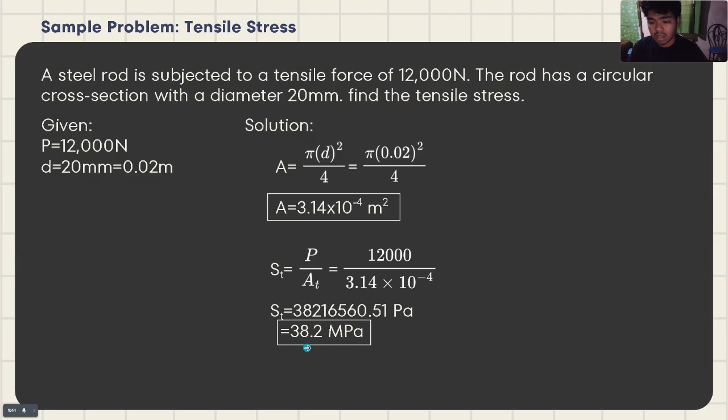Next sample problem, shear stress. A steel bolt is subjected to a shear force of 8,000 Newton. The bolt has a circular cross section with a diameter of 16 millimeter. Find the shear stress. Given force is equal to 8,000 Newton, then diameter, which is 16 millimeter. Convert this to meters, 0.016.

For the solution, use the formula for area, which is equal to pi d squared over 4, equal to pi times 0.016 squared over 4, to have an answer of 2.01 times 10 to the negative 4 meter squared. Since we have the area, we can solve for the shear stress, which is equal to P over A.

Equal to 8,000 over 2.01 times 10 to the negative 4, to have an answer of 39,800,995.02 Pascal. Divide this by 1 million to convert it into MPa, which is equal to 39.8 MPa.

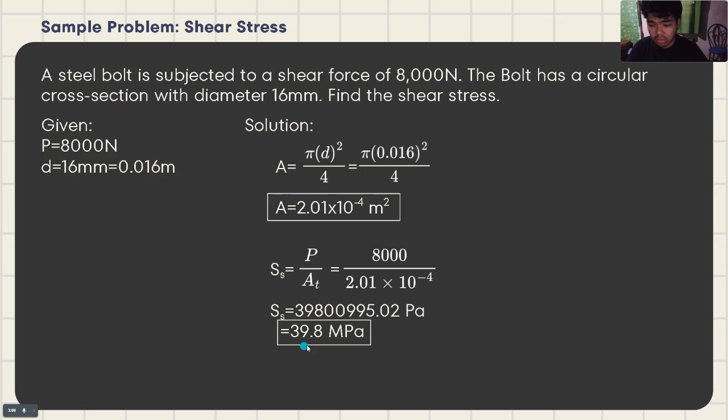Next sample problem, torsional stress. A solid circular shaft of diameter 40 millimeter is subjected to a torque of 500 Newton meter. Find the maximum torsional stress. Given torque is equal to 500 Newton meter, and diameter, which is equal to 40 millimeter, convert this into meters, which is equal to 0.04.

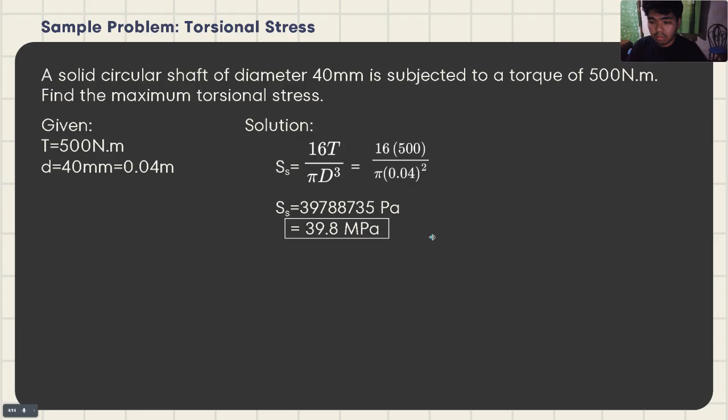For the solution, since this is a solid circular shaft, we will use this formula: shear stress is equal to 16T over pi d cubed, equal to 16 times 500 over pi times 0.04 cubed, to have an answer of 39,788,735 Pascal. Again, divide this by 1 million to convert it into MPa, which is equal to 39.8.

Next sample problem, bearing stress. A steel plate is connected using a bolt of diameter 20 mm. The plate is 10 mm and the load applied is 10,000 Newton. Find the bearing stress on the plate. Given force or load, which is equal to 10,000 Newton. Diameter of the bolt, which is 20 millimeter, equal to 0.02 meters. And thickness of the plate, which is 10 mm, equal to 0.01.

For the solution, since this is bearing stress, we will use this formula for area, which is d times t, equal to 0.02 times 0.01, which will give 2 times 10 to the negative 4 meter squared.

Since we have the area, we can solve for the bearing stress with the formula F over A, which is equal to 10,000 over 2 times 10 to the negative 4, which will have an answer of 50 million Pascal. Convert this into MPa, which is equal to 50 MPa.

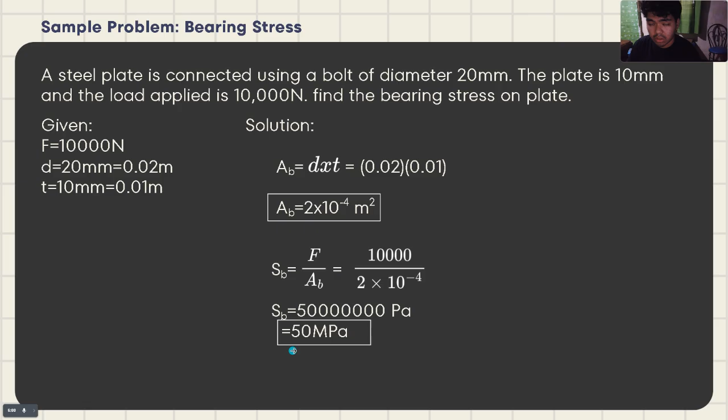Next sample problem, bending or flexural stress. A beam has a bending moment of 10,000 Newton meter at its center. The moment of inertia of the beam is 8 times 10 to the negative 6 meter to the fourth, and the distance from the neutral axis to the outer fiber is 0.05 meters. Find the bending stress. Given: bending moment, which is equal to 10,000 Newton meter, moment of inertia 8 times 10 to the negative 6 meter to the fourth, and C, which is equal to 0.05.

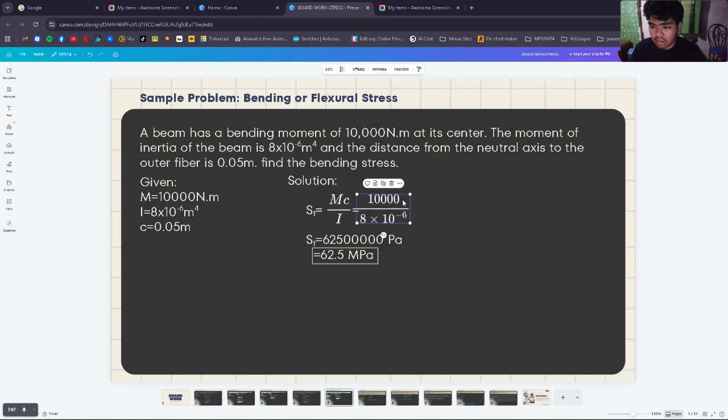For the solution, use the formula MC over I, which is equal to 10,000 times 0.05 over...

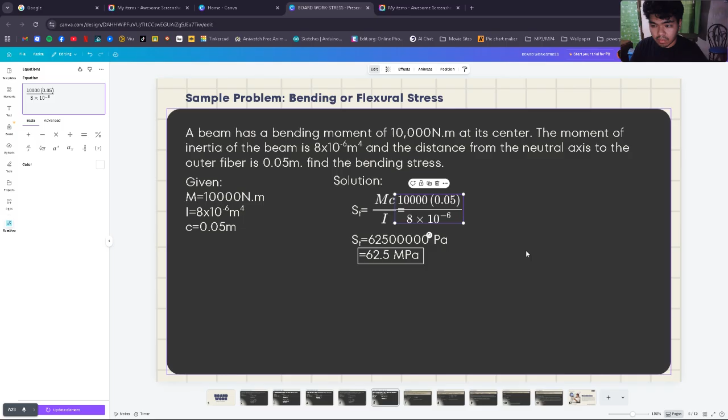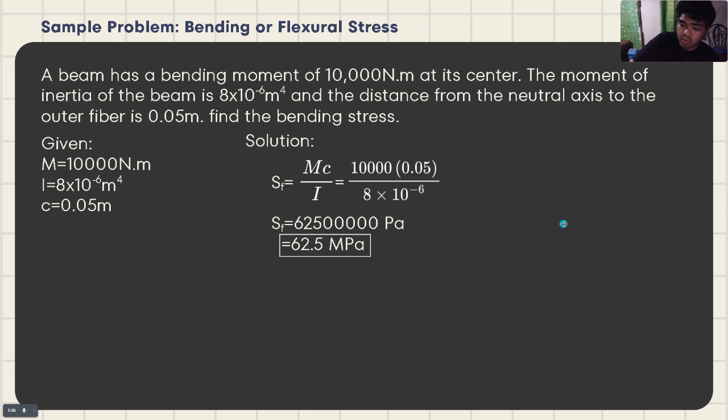8 times 10 to the negative 6, para makakuha ta og answer ni 62.5 million Pascal. So para i-convert din nato siya into MPa, which is equivalent to 62.5 MPa.

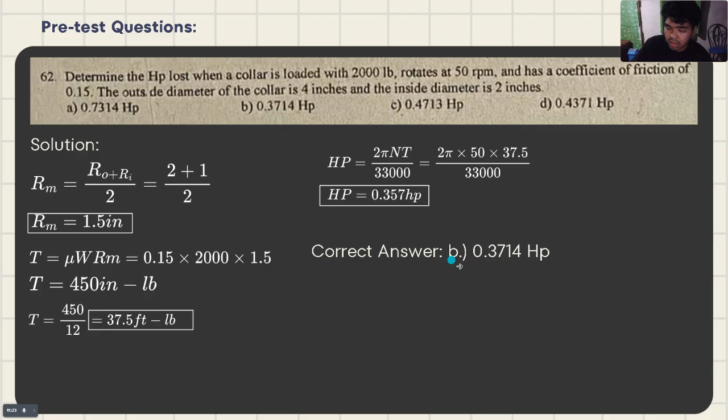Natay formula nga 2 pi NT over 33,000. So 2 pi times 50 times 37.5 over 33,000. So naatay final answer nga 0.357 HP. Since wala man sa choices, ang pinaka-closest ana kay ang letter B, which is 0.3714 HP.

Next, what load in N must be applied to a 25 mm round steel bar, 2.5 m long, to stretch the bar 1.3 mm?

So for the solution, gamitin na to ang area, which is pi d squared over 4, is equal to pi times 25 squared over 4. So naatay answer nga 490.87 millimeter squared.